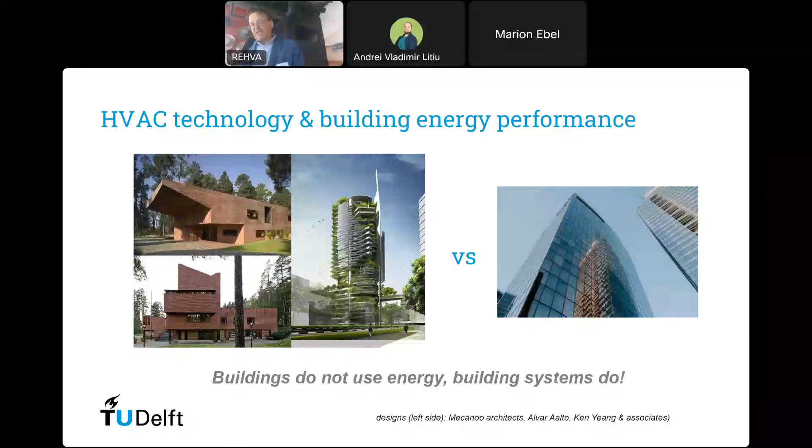If you talk about energy in buildings, people often think it just happens, energy use. Well, buildings don't use energy, it's building systems that use energy, like lighting fixtures, cooling machines on the roof, ventilators. If we are involved in machines for buildings, like EVIA, we definitely have a big opportunity, a big obligation there, to make sure that energy use is decreased, but also with an eye on health and comfort. And that is what we talk about today.

There are 6 issues I want to discuss with you, and I would like to apologize to the people from LightingEurope, because I also have an example related to lighting, but maybe you can ask me about that later. This has to do with daylight penetration especially, but ask me about it later. So there's 6 things I would like to address shortly.

These are issues that I see appearing because we maybe become a little bit too fanatic with energy performance, interpreting the EPBD directive. These 6 issues - the first 4 are directly related to health and comfort: installation noise, overheating issues, ventilation and fresh air supply, and personal control, especially personal control over temperature. These are things I see starting to go wrong in practice with some types of projects, due to the energy policy we're doing. I'm putting this a little bit black and white, but anyhow.

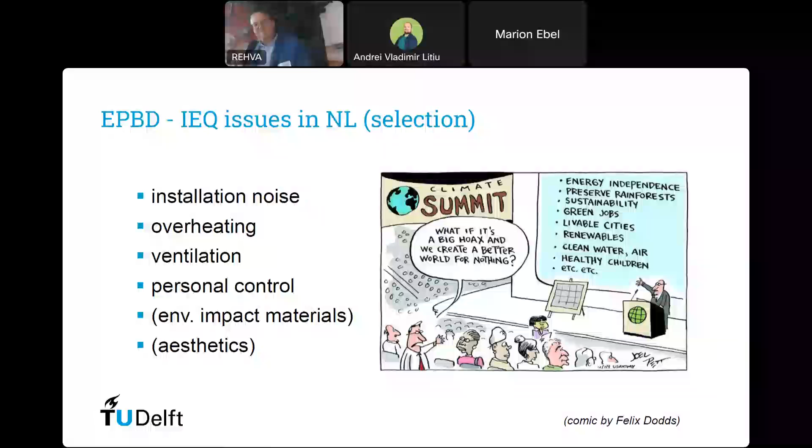Then I want to shortly address 2 other issues that I see. One has to do with environmental impact of materials and circularity, and the other with aesthetics. It's a little bit of my hobby - I work at the Faculty of Architecture, and I have a lot of colleagues that are into making beautiful buildings and built environments, and I'm also a little bit into that. So I have just one slide about that.

If you talk at a party in the Netherlands with an average person about the energy transition, there's a pretty good chance they will start talking about heat pumps, that the neighbors have them, and that they make noise, and that it disturbs their sleep, for example. I'm putting it a little bit black and white. But I think if we really want to convince the average citizen, at least in the Netherlands, then we should talk a little bit about all these energy technologies that could make noise.

Of course, you can design them in such a way that they are not very noisy, but in real life, often people select relatively cheap ones that really create issues - for example, rows, big arguments with neighbors. And again, there have already been lawsuits, etc. So we should not be naive.

If we really want to make sure heat pumps are used more often, which I also support, we have to look at noise inside from your own installation, but also noise towards other buildings and towards the neighbors. Also when you talk about heat pumps for offices and schools, etc. I'm not sure that we're doing that enough. We should do it because, of course, in the EPBD directive it says that whatever we do, it should not make public health worse, and actually, ideally, should make it better.

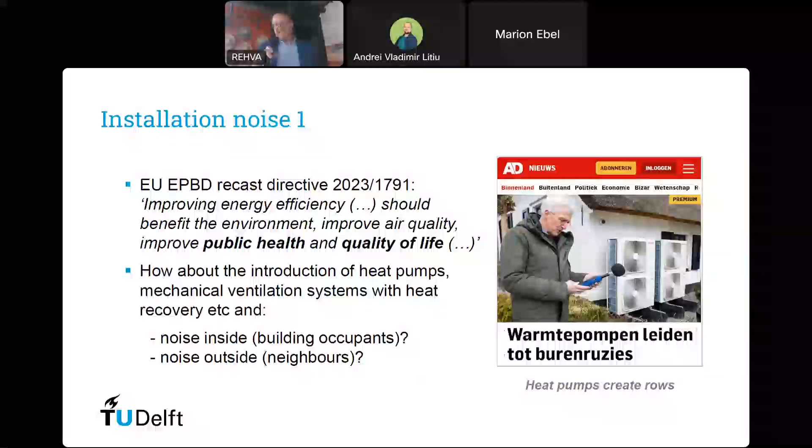Same with quality of life. So we have to think about noise too, because we know noise can have a huge impact on quality of life and health in general.

If you talk about noise, how do we address this in the Dutch context? Well, of course there are official rules about noise from outdoor equipment. In the Dutch situation, that's described in the so-called BBL. It's something new we started at the beginning of this year - I think in English it's called the Environment Buildings Decree. So it's broader than what we used to have with just the building decree.

And of course, on an EU level, we have directives about equipment noise too. But is that connected enough to what we are doing in the corner of EPBD? Question mark. Again, if you want to convince the average citizen in Europe that it's a good idea to do something with PV, like transformers for PV systems, with mechanical ventilation systems, with heat recovery, with heat pumps - if there are too many noise issues related to them, you will see headings in the newspapers that you don't want to see.

Values for what kind of target values you can use for noise inside buildings can be found, for example, in these documents. These are standard programs of constraints we developed in the Netherlands for schools, offices, long-term care facilities, and homes. It gives performance criteria at 3 quality levels. If you speak Dutch, you can download them through this website.

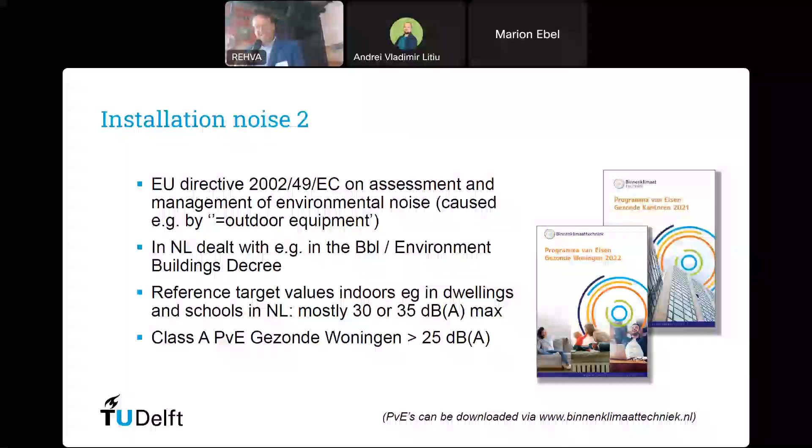Another subject - oh, I see the flag is already there. Overheating. The Netherlands has a long history of looking at overheating in buildings, and we do have the habit of not using very inflexible requirements, like saying no matter what the outside temperature is this week, you always have to stay between 24 and 25 degrees.

No, instead we use adaptive thermal comfort criteria, like the French do, I know. It basically says that if you have a period of like a couple of weeks where it's around 30 degrees outside, you can be more flexible and allow for higher temperatures inside, maybe going up to 27 or even 28 degrees if you have a little bit of airspeed inside.

If you use very strict temperature requirements, independent of the momentary weather outside and independent of whether you're in Italy or Finland, you kind of force everybody into using air conditioning, active cooling, and very high energy use. Maybe that's not necessary from a comfort point of view, and it also has energy penalties. That's one thing I see in projects in the Netherlands, that people tend to use very strict overheating requirements.

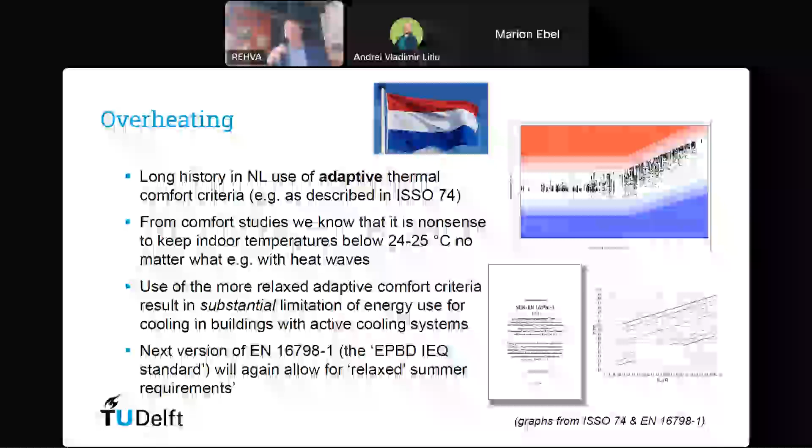I would advocate that, for example in schools and dwellings, we should definitely keep on using these adaptive ones. It's in the European CEN IEQ standard developed in the context of EPBD, the 16798.1. I'm in the position of working a bit on that one, especially on the thermal comfort part, so of course I'm going to fight like a bulldog to keep the adaptive part in.

There's a long history in the UK. The UK has done a lot of research related to adaptive thermal comfort - people like Fergus Nicol, Sue Roaf, Michael Humphreys. But let's keep that in.

We have a Dutch standard, it's called ISSO 74. And this is the picture on the top - it describes how you can do simulations with inside temperature and how you can present those in relation to the adaptive comfort criteria. We first came up with the graph, and after we'd finished it we wanted to use some color coding so you understand what it looks like. Afterwards we noticed it looks very much like a Dutch flag, which was very nice.

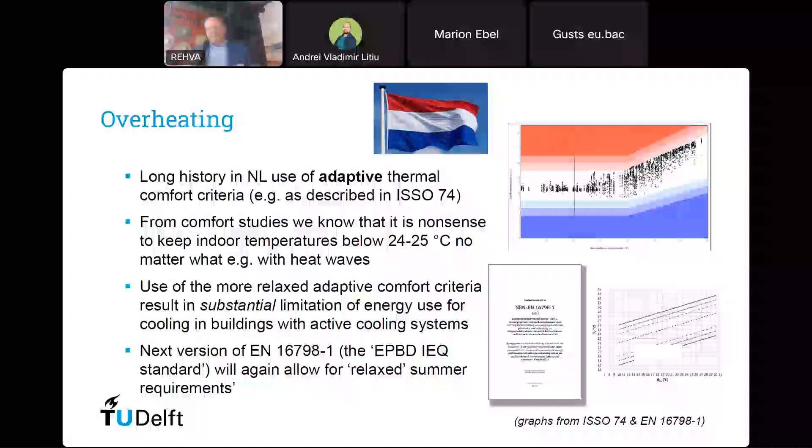You cannot do this in France, because then suddenly you don't understand the graph anymore. Yeah, and maybe if you lie on your side.

Ventilation - another subject I see often in practice causing trouble. From an energy point of view, especially in winter, you want to ventilate as little as possible. That's kind of nonsense, because if you have good heat recovery it doesn't cost that much energy. But within a lot of projects, people say we need to do more with energy, so we should ventilate as little as possible, especially in winter. I think this is a problem, because we know from the COVID pandemic that it's really important to ventilate spaces well, otherwise you have a higher risk of transmission of viruses through the air.

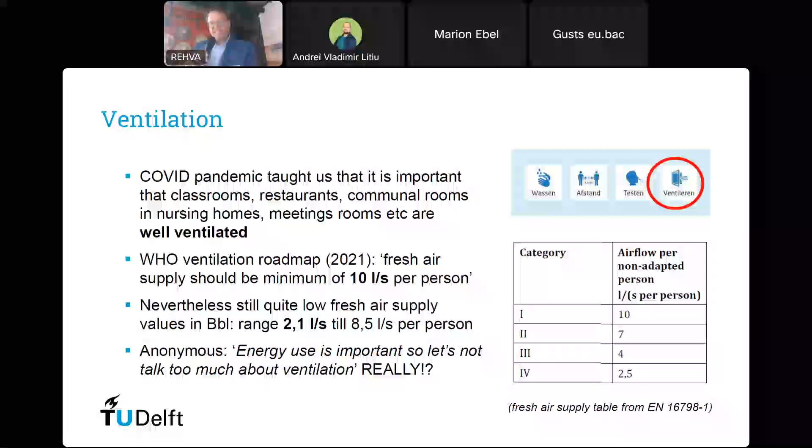But anyhow, we do know that what we now do in the Dutch building decree, BBL, sometimes says 2 liters per second, or 2.1, is good enough in existing buildings. I think we should have a discussion all over Europe about the different building decrees - what the limit values are, and how far off that is from this 10 liters per second. Designing with 2 liters per second per person in the back of your head, like a bedroom for 2 persons, maybe 4 in total - that's just way too low for all kinds of reasons. That's definitely something I see often discussed in practice.

Then this is a bit of a hobby of mine - I once wrote a PhD thesis about it, you can all download it tonight. I see a lot of parties in the Netherlands, and maybe it's just a lack of intelligence amongst Dutch people, but they read the building automation and control systems paragraphs related to the last version of EPBD, and they read it as if we now need to monitor energy, monitor indoor climate, temperature, maybe CO2, and because we need to monitor it, we have some kind of criteria like a bandwidth we have to stay within.

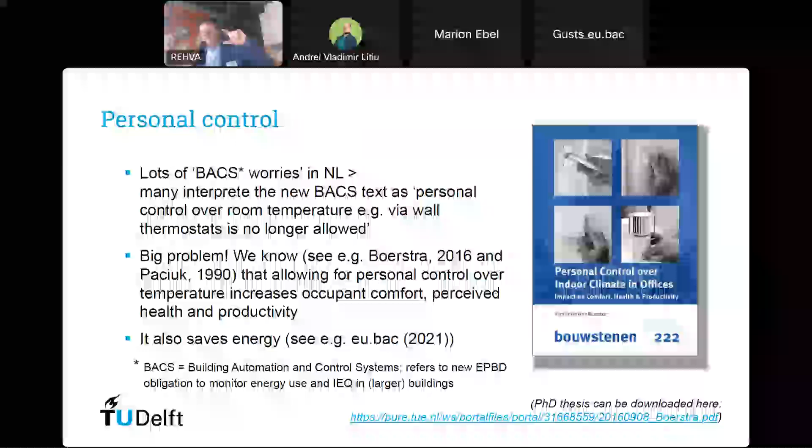And because of that, we should not give people control anymore, because then maybe one day the temperature might be outside the bandwidth. I'm not joking - I've had 3 projects where people basically said, because of 'BACS', we cannot have personal control anymore. So no adjustable thermostats on radiators, no wall thermostats in offices. It's now forbidden because of BACS - that's basically what they say.

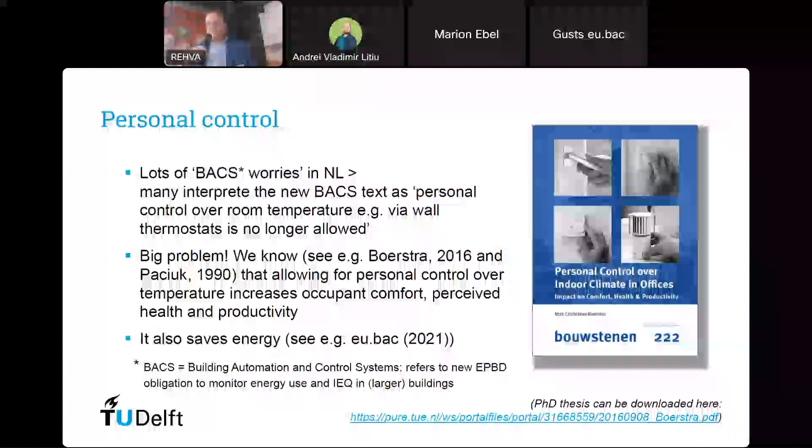I think they misinterpret the text, but we really have to talk about this, because I think it's a very bad idea. We know that if people have options for personal control - Pawel already said this too - they have increased occupant comfort, better perceived health, and it can positively affect productivity. I know from eu.bac, a couple of years ago, they looked into the issue and said it can even save money, not just in a residential context, but definitely there. And it can save energy, because you know much better how to keep the temperature at a certain level, and it doesn't go like an open-closed kind of valve. So let's have a talk about this. Very important.

Then, so the last two, maybe crazy stuff. Do you have two more minutes, Pawel? About four. Okay.

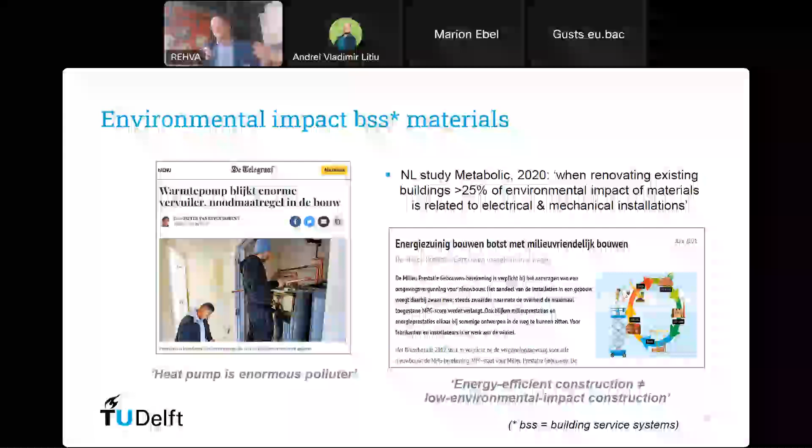Another thing I worry about, and that's really on the agenda in the Netherlands, especially at the university - I have a lot of colleagues really into circular buildings. If you're into circular buildings and you do a little research, you'll find out, see the quote on the right, that especially if you renovate buildings and reuse columns and floors, the hidden environmental impact of the materials you use matters. Often when you do deep renovation, you change the heating, electrical wiring, lighting, cooling system - there's a lot of metals involved, copper, aluminium, you name it. The hidden environmental impact on just installation and replacement goes up to more than 25% of the total environmental impact of the renovation. It's a huge impact, and I'm trying to convince REHVA to put this higher on the agenda. I know the next version of REHVA, maybe two after next, there will be an article about this, but we have to talk about this.

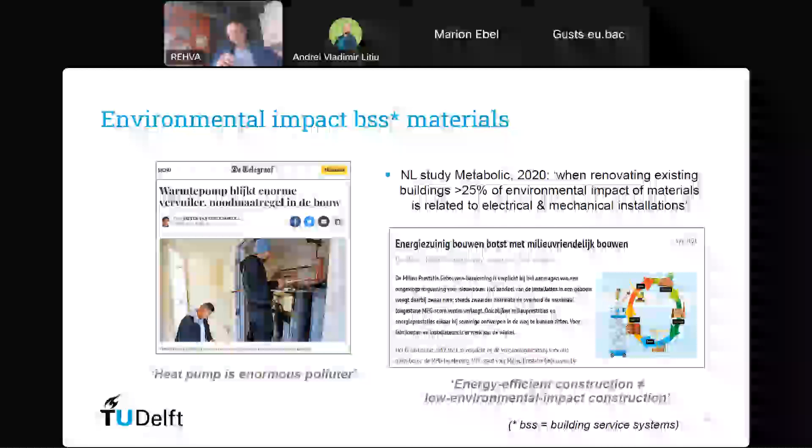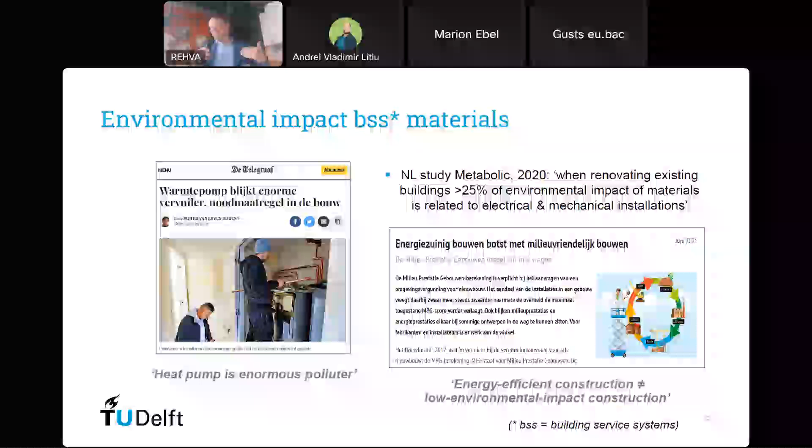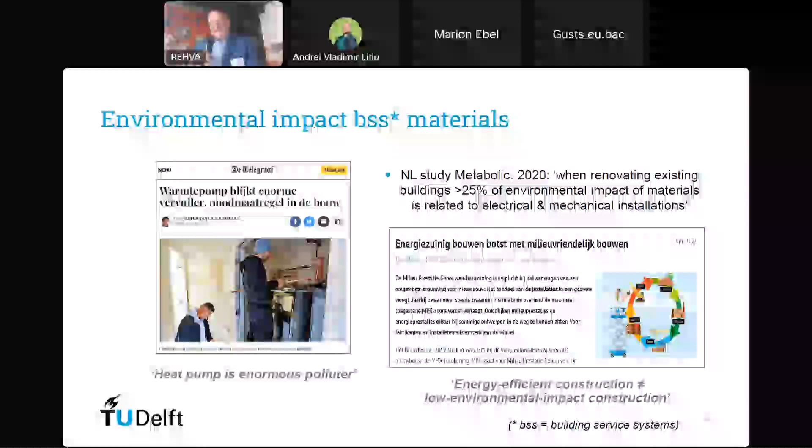And then, of course, if you do the right thing on the energy performance side and install a heat pump, for example, often the thing you use to improve energy efficiency at the same time has a much higher material impact than what we used to do. A standard gas heater that we used to use in a residential context uses maybe a third of the amount of metal that a heat pump uses. I'm not saying we should not use heat pumps, but if we have a discussion, we should look at energy, environmental impact of materials, and health and comfort - not just energy on one hand and health and comfort on the other. Of course, we also have legislation coming related to circularity and environmental impact of materials, so we cannot put our heads in the sand, as we say in the Netherlands.

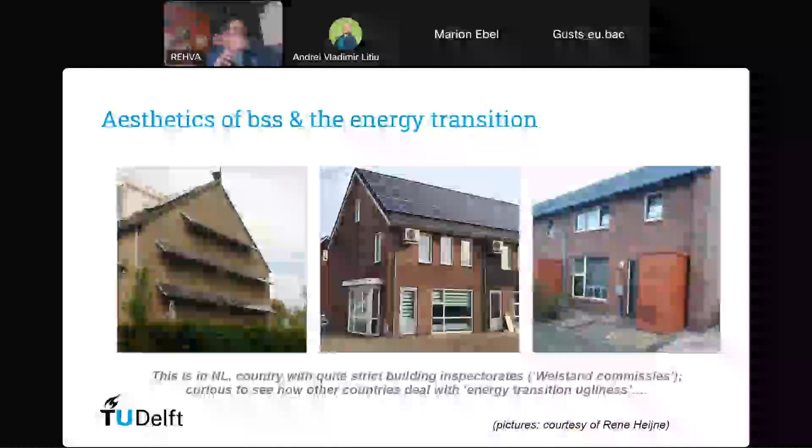This is my last remark. A friend of mine works for what we call the welstand in the Netherlands - something really Dutch, I think. In the Netherlands, whatever we do - I'm not going to make jokes about Belgium - if you change a city or neighborhood or a row of houses, you have to go to the welstand and they will look at it to see if it's beautiful or not. That's basically what they do. So it's like an aesthetic building inspectorate, I'm not sure how to say it.

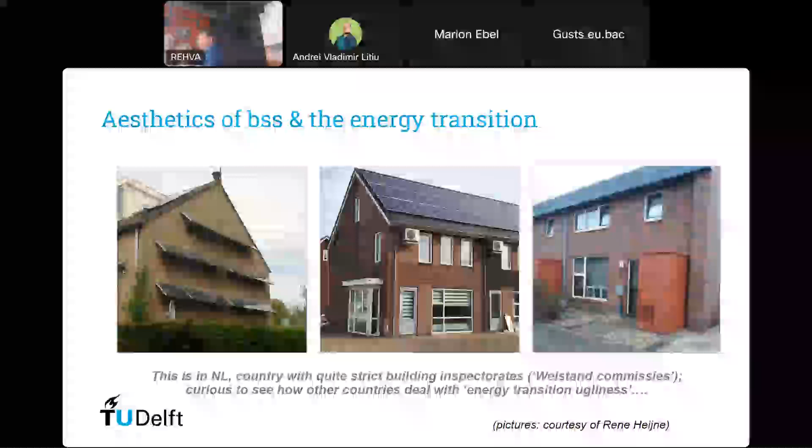Again, these pictures are from projects that kind of slipped through welstand. It's from a friend of mine who works there, René Heijne. He was not too happy with this one, for example, because the color is just off. Maybe make it gray or make sure it's also made out of brick. There's a heat pump in here. And also the one in the middle, you get these little gray things - the outside unit of your heat pump - I'm not sure I'd like to look at that if it's my neighbors having them. If I have them myself, it's okay because I don't see them. But on the other side, as in the example on the left, that's of course an existing situation.

I think there are more subtle ways to include some PV panels. I'm a little afraid that if we don't think deeply about this, Europe will become much more ugly than it is right now, if we just put all kinds of energy technologies on and around and on top of buildings without thinking about aesthetics. So think about this.

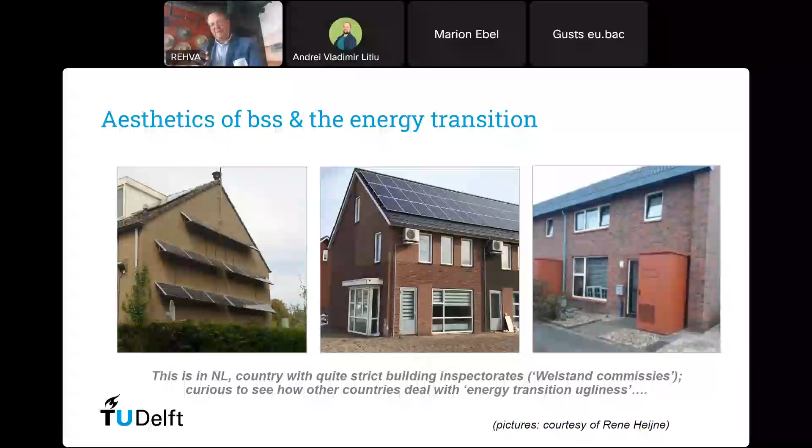So my last slide, take home message from the Netherlands to Europe: further implement EPBD, very good idea.

I also support this strongly. I think we should even actually hurry up things more than we're doing it right now. Energy performance, energy transition is very important, but let's really keep a keen eye on issues that are happening in the corner of maybe installation noise, inside and outside, overheating. Let's avoid too strict summer requirements. It definitely has a dimension in the energy corner.

If we talk about ventilation, let's have a discussion again. I'm sure Pawel is very happy about this, about how much fresh air supply we need, and are we not forgetting about all the health effects in that corner. Definitely, let's talk about personal control over temperature. Let's not lose that. It's very important to have it and to keep it. And we should address environmental impact of installation materials and aesthetics.

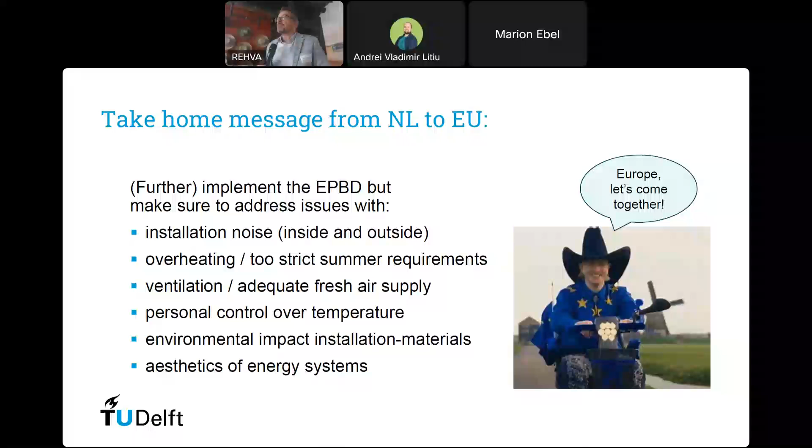Valérie is the project director of indoor environmental quality at CEREMA, an expert in building ventilation, air tightness, and indoor environmental quality. Currently, she serves as the project director for indoor environmental quality and ventilation at CEREMA. And for those who don't know, CEREMA is a public research and design office in France. She leads national and European working groups to ensure consistency between standards, regulations, and latest research findings.

Her responsibilities include initiating research projects, such as revising the ISO 9972 standard and managing submissions for major European projects for Horizon 2020. As the convener of CEN-TC 156 WG23, you'll have to explain to us what it means. Anyway, she leads the revision of the EN 16211 standard. And for AIVC TightVent, she's a coordinator of the TightVent Air Tightness Association Committee, working on air tightness and inspection of ventilation systems. So, the floor is yours.

Thank you very much, Pawel. I will talk to you about how we have already started in France to implement the quality provisions that are in the EPBD directive. Well, we are not quite there yet, but we still have done something in the previous regulation. As we have already discussed at length, indoor environment quality is a new focus in the EPBD directive. This is directly in Article 1, and we even have a definition of indoor environment quality, which includes temperature, humidity, ventilation rates, and presence of contaminants. And all this needs to be taken together with the energy performance of buildings, which is a very good thing.

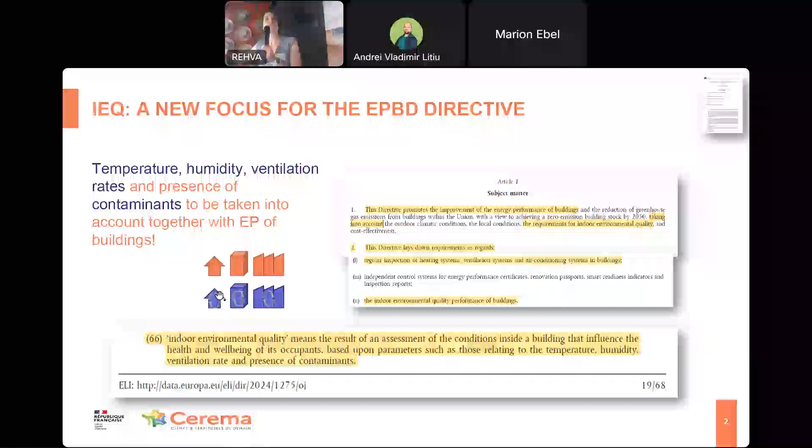So you will see my nice icons here. It's not done by AI, it's done by myself, and I'm very bad at doing those kinds of things, but that's supposed to say dwellings, single, multifamily, and that's non-residential buildings, that's new buildings, and that's refurbishments. And this will be useful for the rest of the presentation because some of the regulation applies to one or another. I should try to use AI to do those things better.

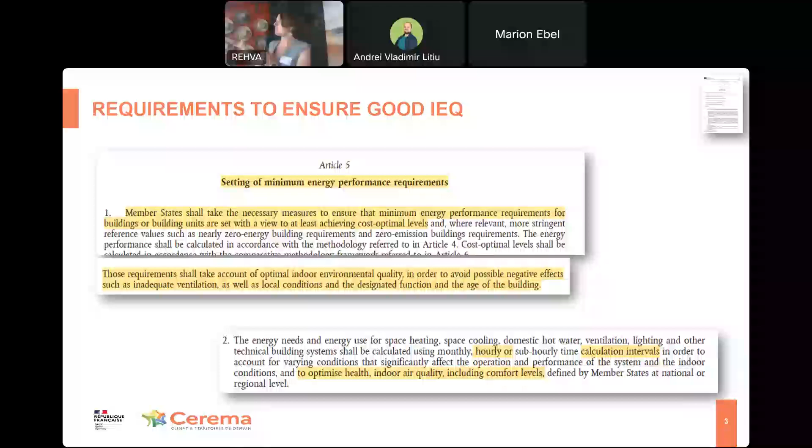Okay. So in Article 5, the EPBD directive says member states shall take necessary measures to ensure energy performance requirements, and those requirements shall take into account indoor environmental quality also. So what we have right now in our energy performance regulation, which is called RE 2020, which came into application in 2022. We always have 1 or 2 years after our objective, but that was because of COVID. We already have this thermal comfort assessment, as Atze was saying.

We've got in the regulation indicators on 3 subjects. One about life cycle assessment, well, actually 2, full life cycle assessment of the building, about the energy use, the use of primary energy, and encouraging renewable energy, etc. So we've got 3 indicators on this topic. And then we've got one about thermal comfort, which is actually the sum of the difference between the actual temperature and the comfort temperature during the summer outside heating season.

And this comfort temperature is actually adjusting over time, because if you've got like 10 days at hot temperature, it's adaptive comfort, so this temperature increases. And we've got a limit on this degree hour of discomfort. The calculation is an hourly calculation, and this regulation is really performance-based. That means that we've got very few prescriptive requirements in it. We just need to reach those indicators.

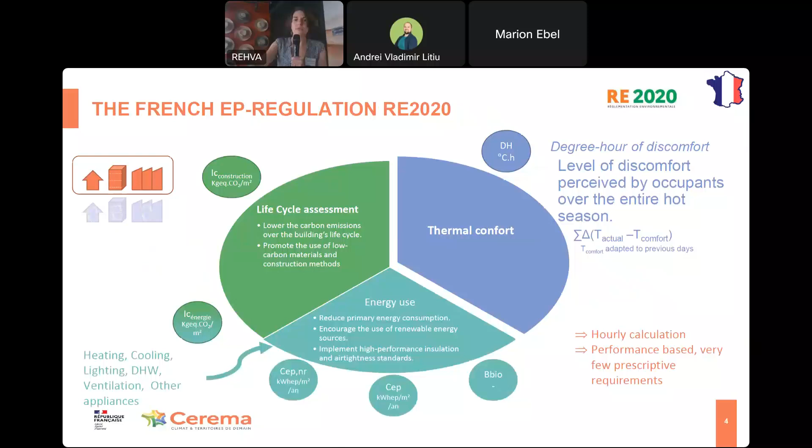In existing buildings, well, we still have, so you see, new buildings, orange ones, on my topic here. In existing buildings, where we are not quite there yet, we do have a regulation that applies to very big renovations in some kinds of buildings. And we do have an indicator for thermal comfort. We calculate the temperature that is reached after 5 hot days.

And there is a limit, but that is building dependent. So this limit can actually be really high. For example, I had an example once where the maximum was 32 degrees. And so as long as we were below 32, it was okay, so this indicator is not very good, but we should revise this regulation soon, whatever soon may mean.

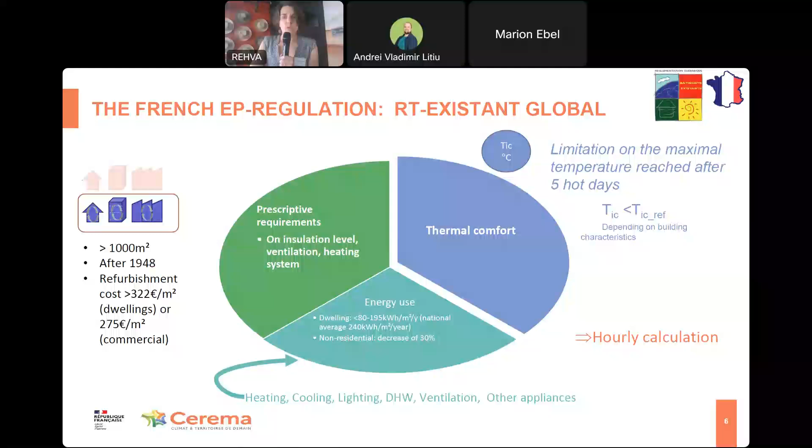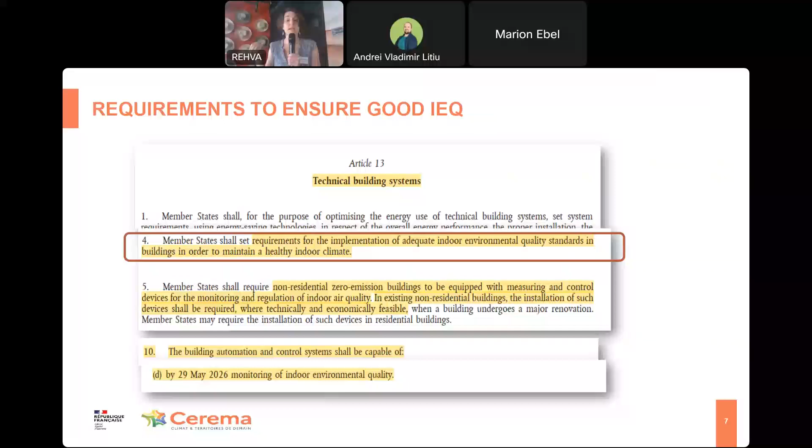Now, this is for temperature, but it's not the only focus of the EPBD. The EPBD also focuses on health, and health includes indoor air quality. That is not included in the energy performance regulation. It's another code that makes the requirements on indoor air quality in France. We've got the construction codes that say air renewal should be such that in normal conditions of use, the indoor air pollution does not endanger the health and the security of occupants, and that condensation is avoided except temporarily. So that's the construction codes.

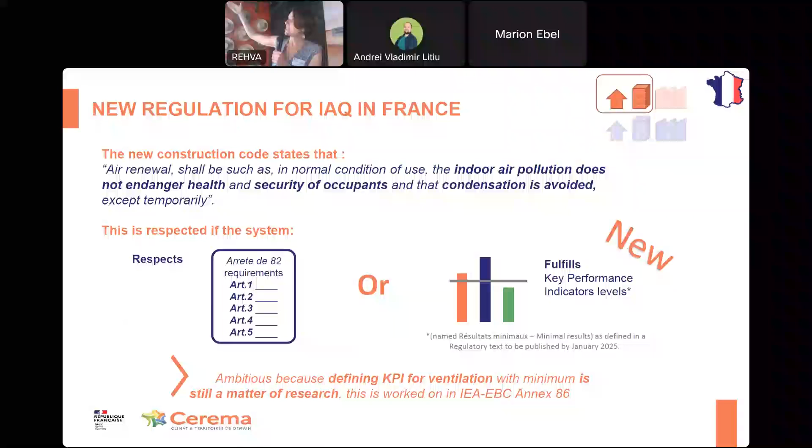And then we need to say, what does that mean actually? Because that's, well, quite easy to say. So in the regulation, we say it's okay if it fulfills the prescriptive requirement from 1982, which gave flow rates, a bit like everybody, per room. But it is also okay if it fulfills new key performance indicator levels that will be defined within 2025. So we are actually working very hard to be ready for 2025 and define those key performance indicator levels that ensure that health is not endangered in our buildings.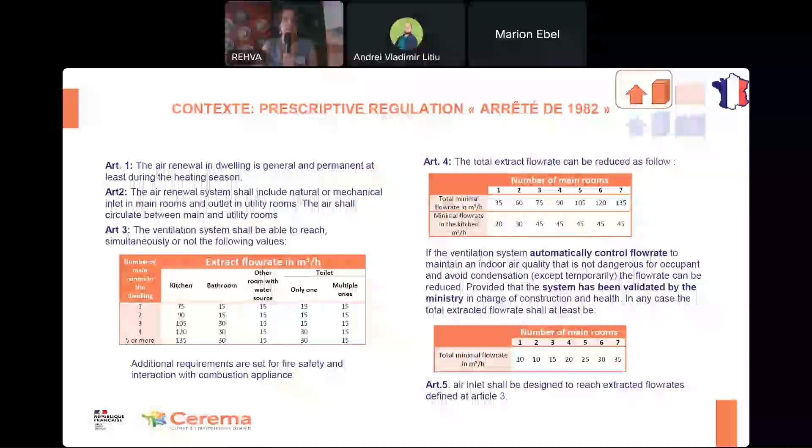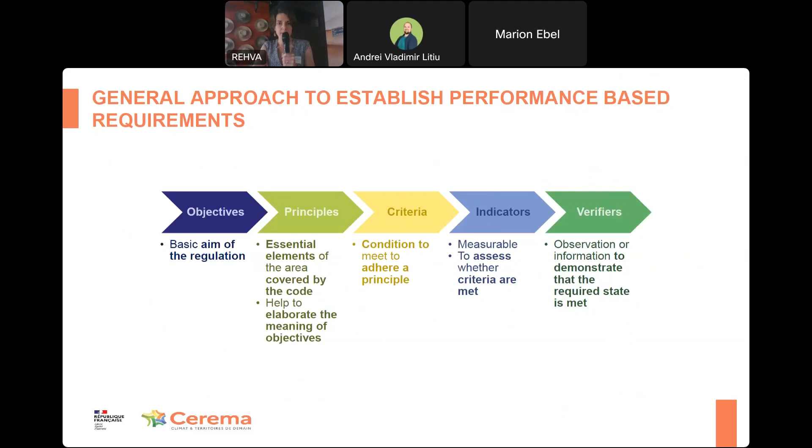So as I say, this is a prescriptive regulation that will remain as it is, but we will have a new alternative, which will be performance-based. And that's what we are defining right now, trying to establish what the indicator will be and how we will check that the ventilation system actually does not endanger the health of the people in it. So to define those key performance indicators, we first had to think, what is the objective of the indoor air quality management strategy? What do we want to reach?

We've got objectives on health. We want to limit the exposure, long-term and acute, to pollutants emitted by the building and by humans. By humans, I mean by human activities also. We have objectives on well-being. We want to rate the impact of the system on sleep quality, on the stuffiness in rooms, and we also want a certain level of perceived air quality.

For example, we are talking only about residential buildings here, the focus here is only on residential. We are not talking about non-residential here. A level of perceived air quality in the toilet, for example, and we've got the risk of condensation that may affect the building durability.

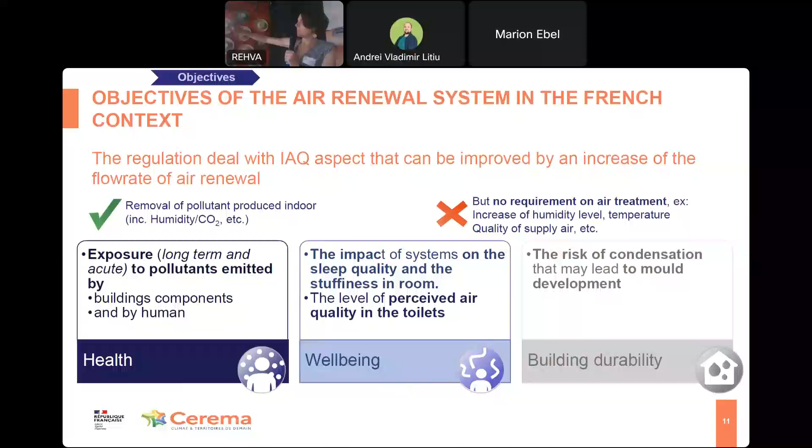Starting from defining the objective, then we say, okay, how do we want to assess that in the design stage? We want to assess that through preliminary simulation. We talked a bit before about the indicators not being the same for assessment in the design phase, for monitoring, or during the commissioning of the building. And here we only focus on the preliminary simulation, so the design phase.

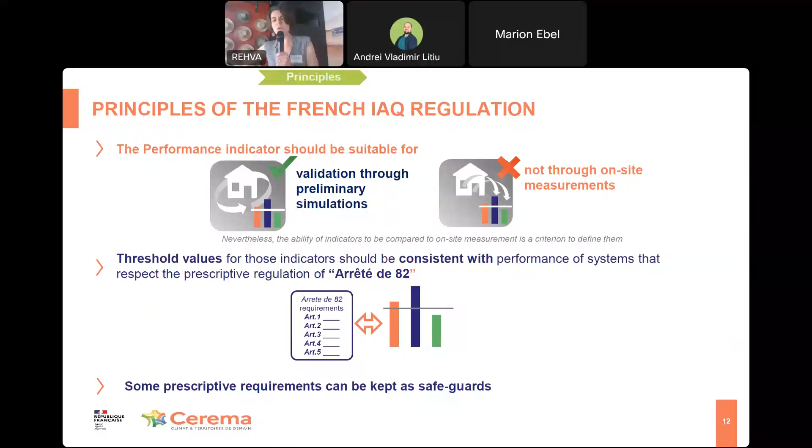And we want to have threshold values that are consistent with what our systems are doing right now. So for the systems that are consistent with what we call arrêté 82, we will have threshold values that are consistent with that. And so here is the indicator we have basically chosen. First of all, it's very important that it's not possible to assess indoor air quality with just one parameter. So actually, to have a requirement that is equivalent to our prescriptive requirements, we need 5 parameters.

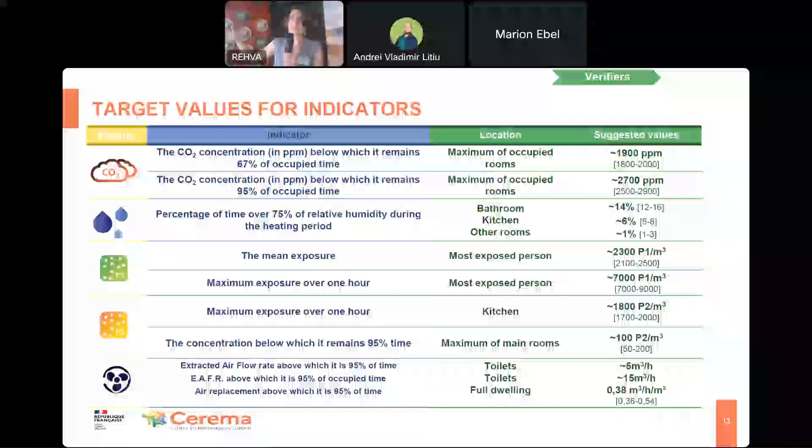One on CO2, one on humidity, one on fictive pollutant P1 that is emitted continuously, one on fictive pollutant P2 that is emitted during cooking, basically, and one on air renewal rate. And for each parameter, we have 1 to up to 3 indicators associated, okay? And then we have a target value for this. The values given here are not validated yet, but given the results of our simulations, it should be more or less that. That's very, very high, but that's actually how our systems are performing right now.

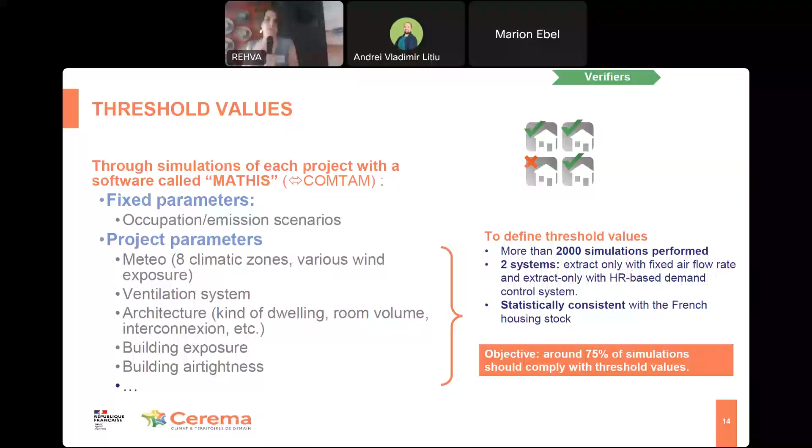So what we have done is more than 2,000 simulations with the 2 systems, on a series of buildings that are consistent with the building stock in France. And so the objective is that 75% of the simulations meet the new threshold values that we will define, so that we have 2 regulations that are consistent with one another. And that's how we get those values.

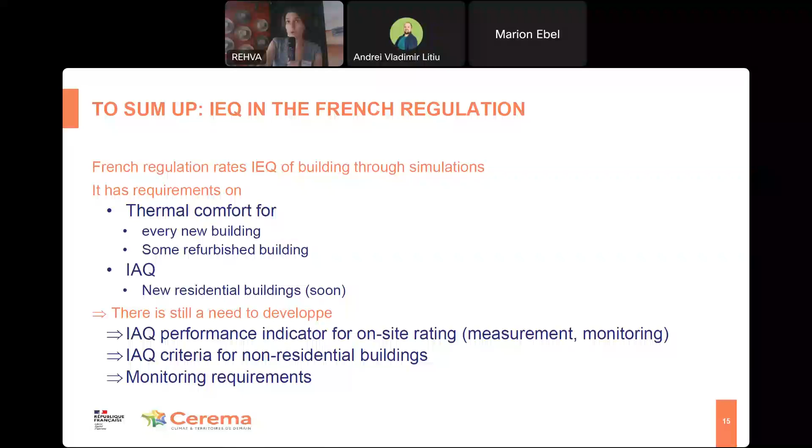So to sum up, regarding indoor environment quality, the French regulation rates indoor environment quality of buildings through simulations. It has requirements on thermal comfort for every new building and for some refurbished buildings. It rates indoor air quality solely for residential buildings, but we still need to develop indoor air quality performance indicators for on-site rating, measurement and monitoring. We need to develop indoor air quality criteria for non-residential buildings, and we need to develop monitoring requirements if we want to fulfill the EPBD directive.

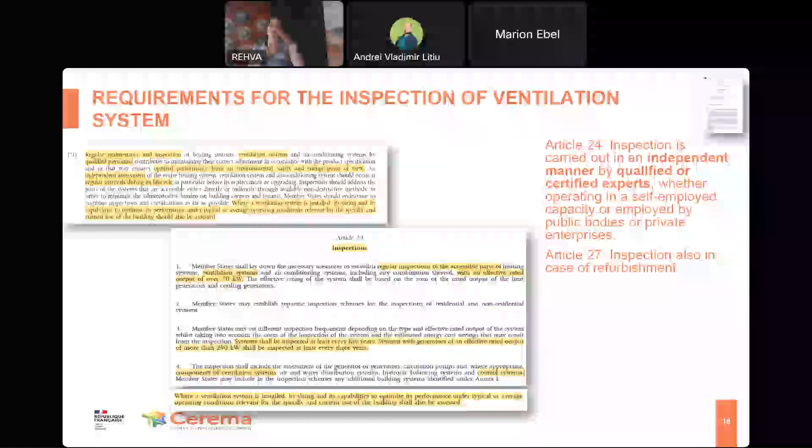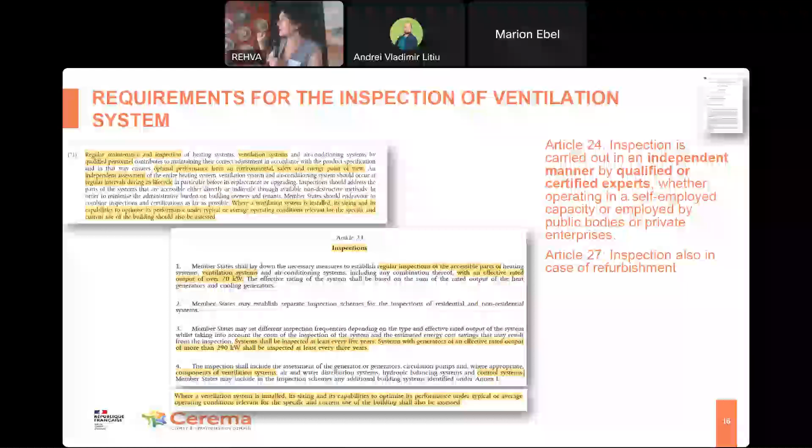Before I finish, I would like to also insist on the inspection of ventilation. So Pawel, you were asking about TC156 working group 23, about inspection of ventilation systems, of which I happen to be the convener at the CEN European level. And in the directive, there is this Article 23, which is very important, that now imposes a regular inspection of ventilation systems together with heating and cooling systems for systems that have an effective rate above 70 kilowatts. So that means that big systems will need to be inspected every 5 or 3 years.

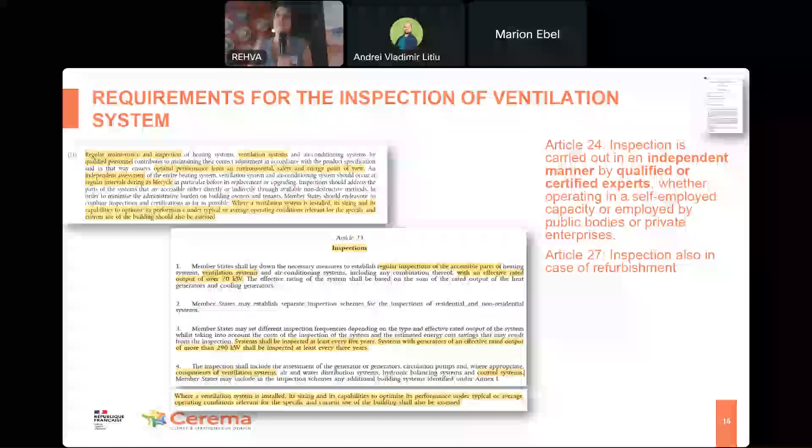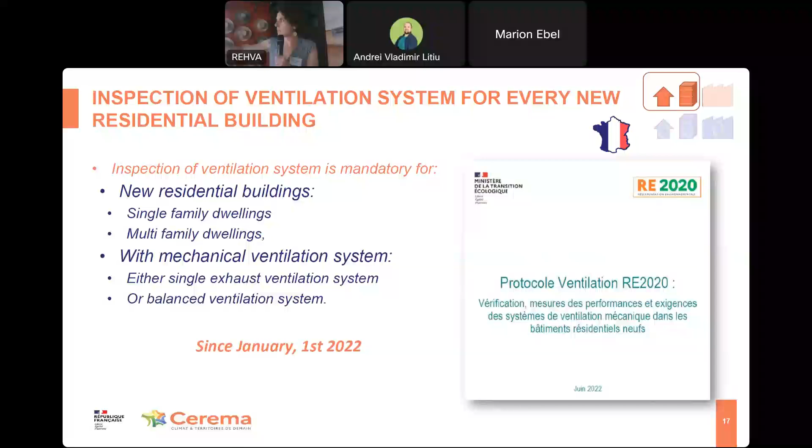So what we have in France now in regulation is a mandatory inspection at commissioning, only at commissioning, for every new residential building. Again, it's only focused on residential buildings, unfortunately, but our regulation is 40 years old, so we now know quite well how to inspect those systems that are all the same. So we do have a protocol, and we have had this mandatory since 2022. This is done by a qualified inspector that is independent, with the whole process of training and validation. And for one thing, we are also ahead of schedule.

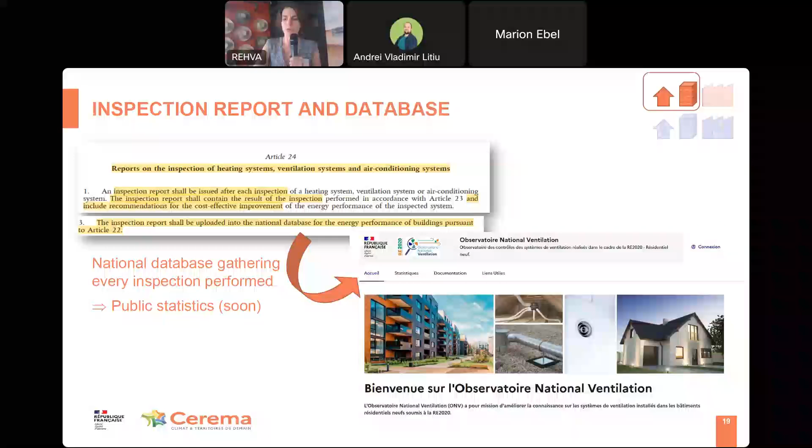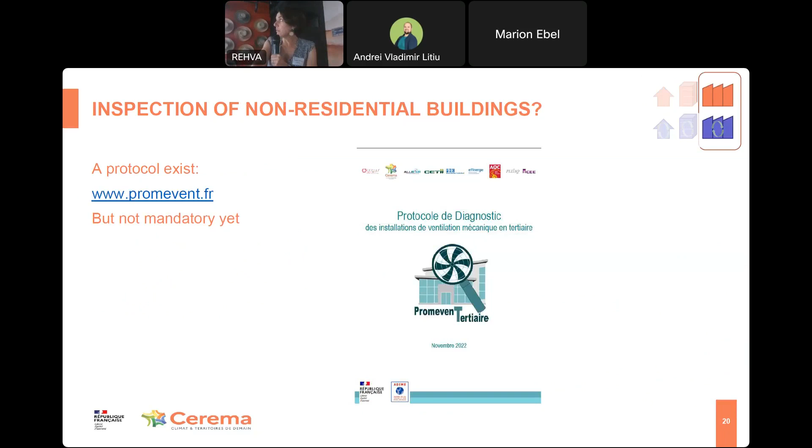In Article 24 of the EPBD directive, you've got the mandatory database that needs to be set. That means that all inspection reports should be uploaded in a national database. And that's actually what we do. We have this National Observatory for Ventilation, where every inspection report is uploaded, and that will provide public statistics. It's not yet available because we need to have enough data to put the statistics online. Otherwise, we would be able to spot which building has been inspected. But within a few months, it should be done. And for non-residential buildings, we do have a protocol, which is already done, but it's not mandatory yet.

So to conclude, the challenge for the coming years, at least in France, will be to build something for non-residential buildings, make indoor air quality requirements, make a mandatory inspection protocol at commissioning and then every 3 to 5 years. That's the big thing. Regarding renovation, we need to build this renovation plan. I was talking about it, and we need to include indoor environment quality requirements and an inspection protocol also for those refurbishments. We need to develop the smart readiness indicator as required in Article 15, also including the resilience of buildings. And we need to work on building automation and control also.

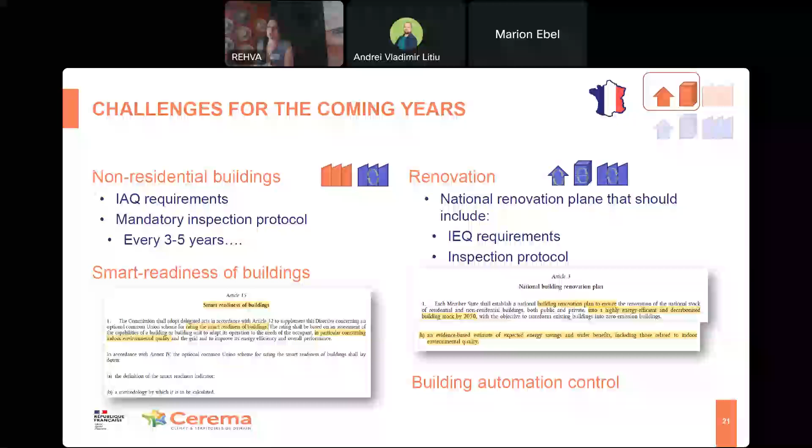In standardization, we still have challenges. As I was saying, I'm in charge of EN 16798-17 about the inspection of ventilation systems. And this standard needs to be revised to better tackle the question of demand-controlled ventilation systems, because this is probably one of the answers to good indoor environment quality while controlling the building energy use. We have to better tackle the inspection of indoor environment quality also in this standard. Actually, we just check the flow rates basically at the ventilation system. And also tackle the question of the regular inspection, which is not the same as the inspection at commissioning.

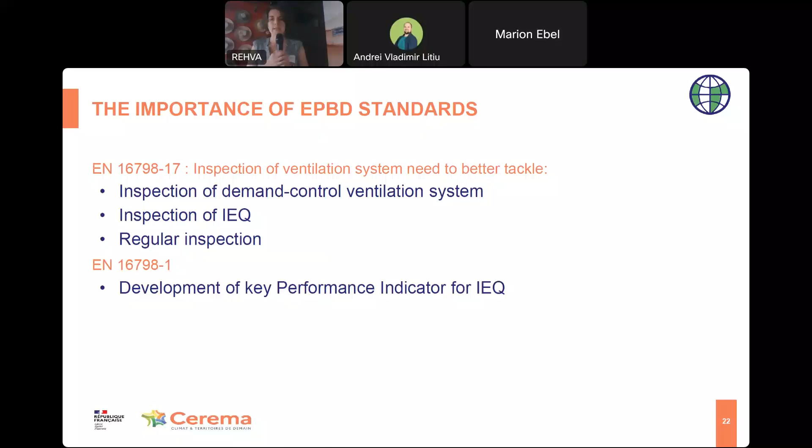And in EN 16798-1, we need to develop also key performance indicators for indoor environment quality to give guidance to member states to develop their own performance indicators as required in the EPBD. Thank you for your attention.

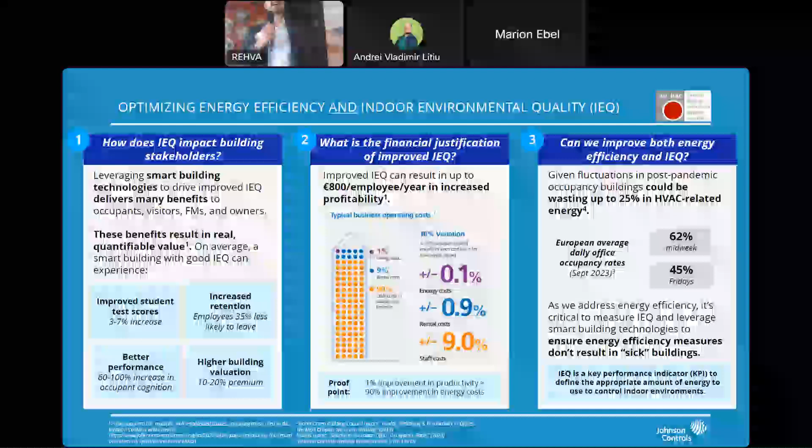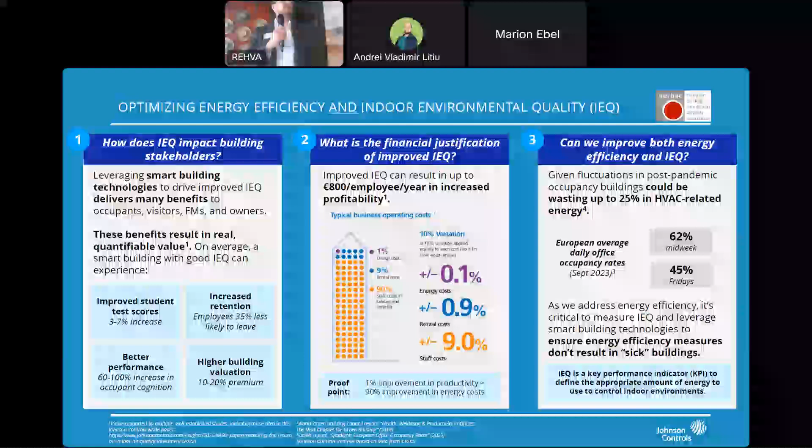I'm very honored and pleased to be with this esteemed group. Thank you so much for having me, and thank you to eu.bac for hosting me and Johnson Controls as part of this group. It's really an honor, and I've just been eating up everything we've been talking about so far. What I hope to contribute, both in this short couple of minutes and to the panel discussion, is the perspective of what it takes to make this stuff happen on the ground.

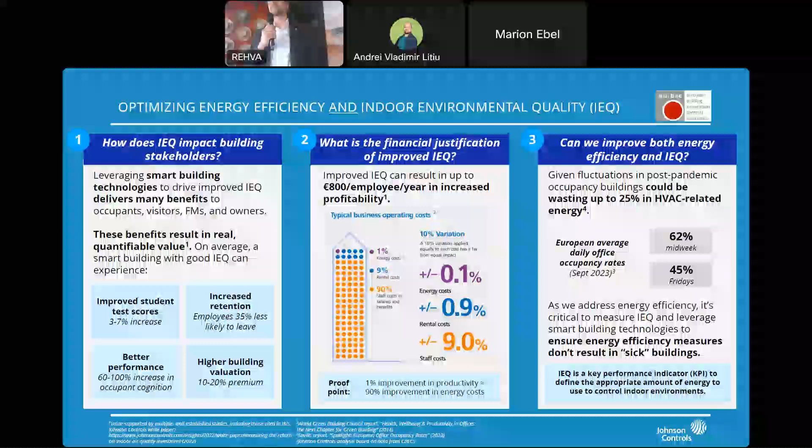We've talked a lot about the why, and you'll recognize some statistics, even a graphic in the middle, that's already been presented to you today. I believe in this room, and with some outside of this room, the why is already well understood. We've got statistics. But what it takes to actually make this stuff happen on the ground is where we need to focus our efforts. My team and I think about this every day in front of customers and prospective customers who are trying to make this decision: do I invest in this, yes or no?

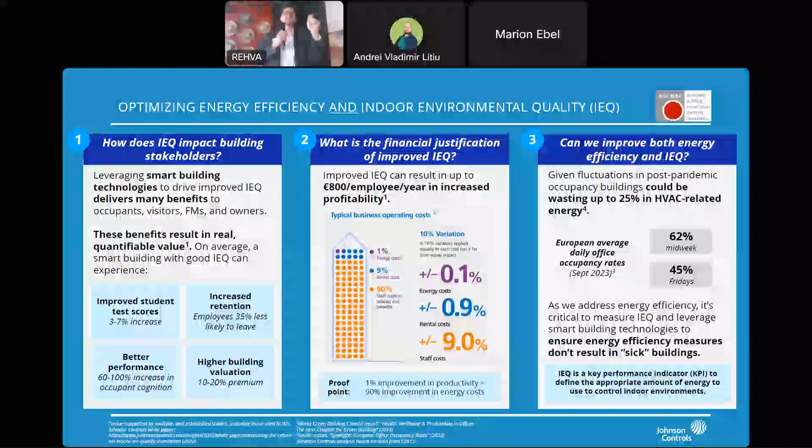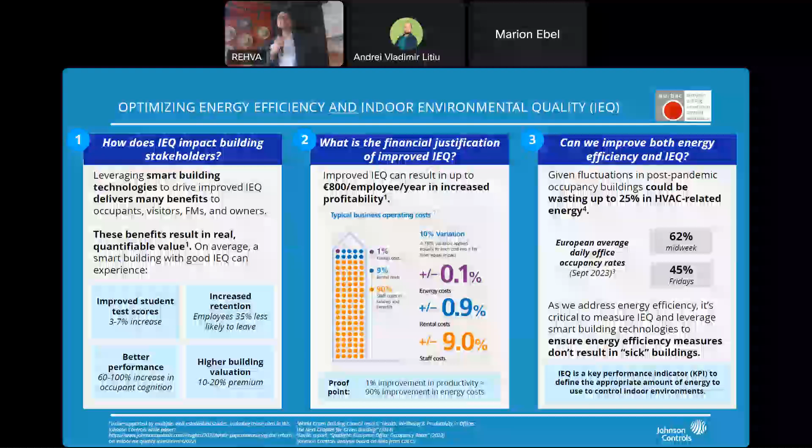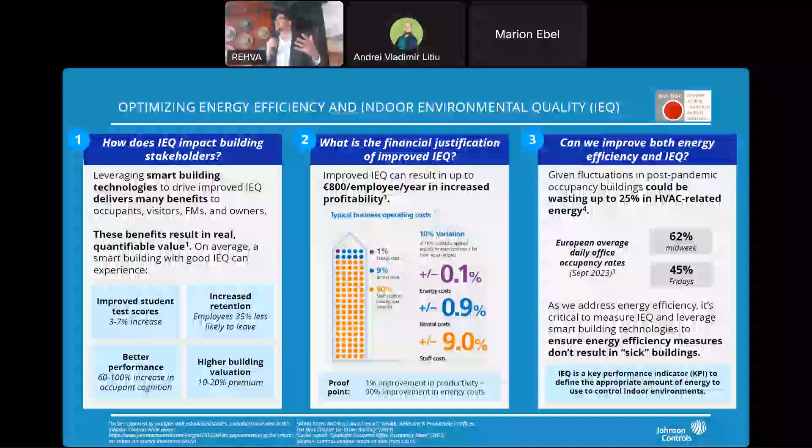Oftentimes it comes back to return on investment. There may be some carrots out there to encourage me to do it, there may be some sticks, but it needs to make good business sense. So I've got a statistic on the top middle of this page: €800 per employee per year. That's our conclusion after going through a lot of the existing research on what is the business justification of investing in improved IEQ. And I think Pawel may have been an author on some of the papers we referenced there.

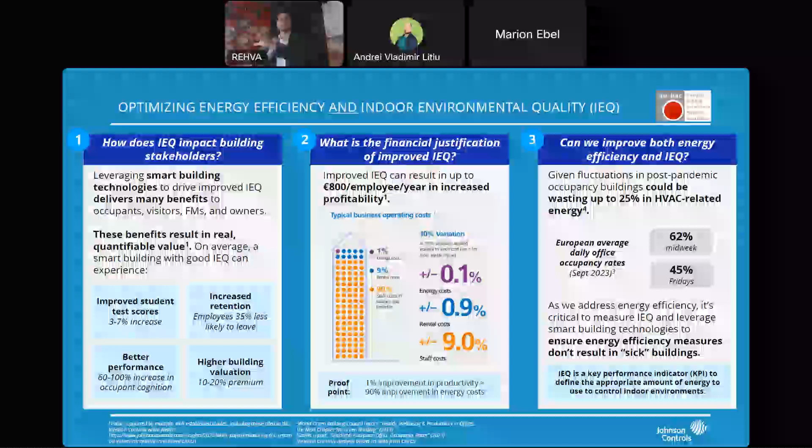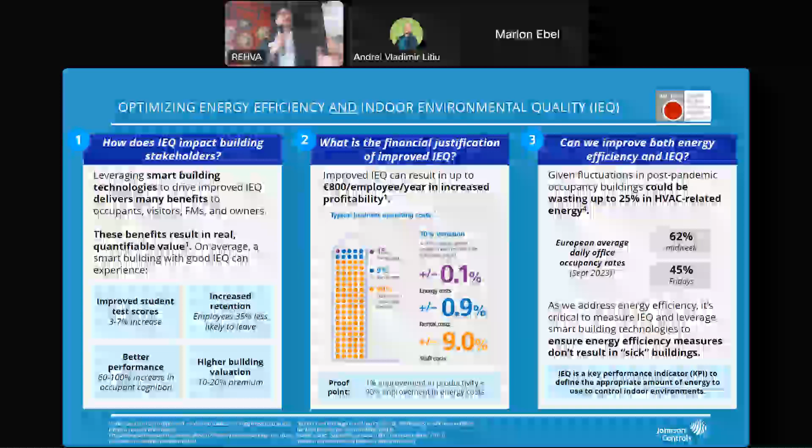I want to focus, as I finish up, on the right side here. We've talked a lot about how it could be costly to implement IEQ measures. Costly versus what baseline? That's something I'd like to explore in the panel in a minute. But we've also got this force acting upon us, this pain point of occupancy rates in buildings, especially commercial buildings, not being what they were designed to be.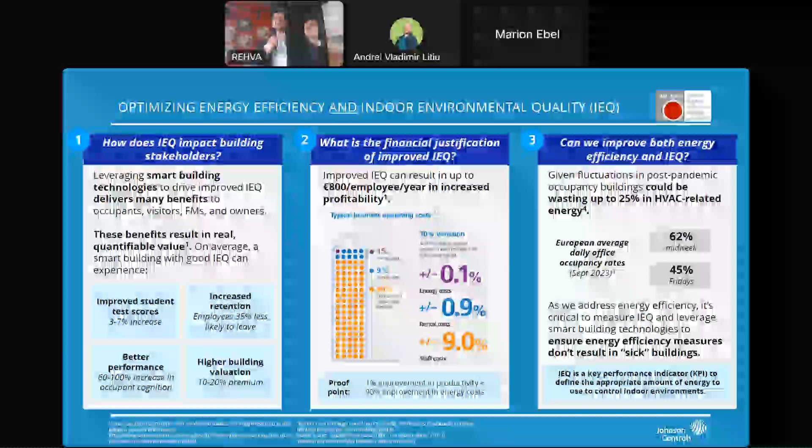So my challenge to us is, as we consider energy efficiency measures and improvements, we've got to use IEQ as a KPI. That word, indicator, has come up a lot already this afternoon. That should be our minimum in some cases. We cannot improve the energy efficiency of a building without also being mindful of the impact on the humans who occupy that building. So thank you for having me, thank you for including me in this discussion, and I look forward to talking more in a minute.

Today we have the opportunity to work with very efficient light sources, and therefore we have often focused a lot on energy efficiency. But a very important aspect is actually the quality of light which we could get there. For example, in such a building, we could ask just for basic quality, just to see anything in a building, or that we can really appreciate the building. And the quality of a building is also how much it is used.

If we create very attractive spaces where the public, the younger generation and the older generation would like to go to, then the building is actually used. But if we just install the minimum light quality, then probably people will not find it very attractive to go to the library, to study there, to learn something there.

So therefore, we recommend really to consider this aspect. It's similar to food. You could think for dinner, for example, a very nice, easy instant soup to do this. For one evening, it might be okay because you might be in a rush. But just imagine eating instant soup for 10 years. So it's more really about the quality of food which you have there.

And therefore, we are asking to create not the minimum lighting quality in a room, but a sustainable quality. And therefore, you will have benefits for well-being. We've heard something about health, the circadian rhythm, the changes which are there.

And so it's also really about figuring out how we can actually control this afterwards, not only planning it, but also making sure that it's installed there. And today we have even metrics available where we are not just asking how much light is coming out of a fixture, but actually how much light is perceived by the eye in the area where you're looking at.

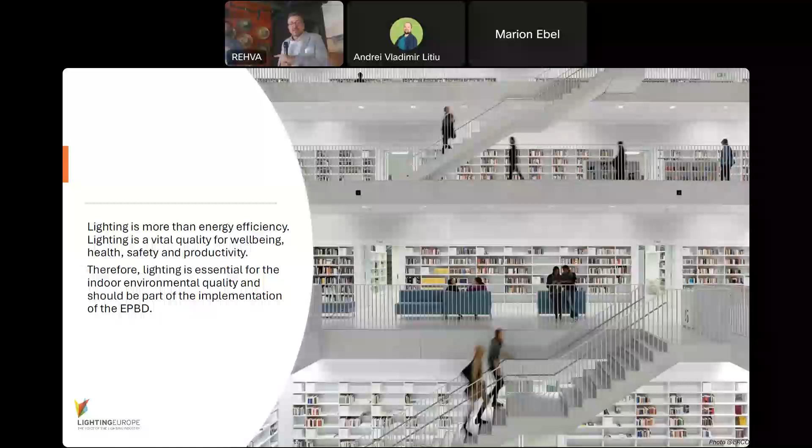Okay, the last panelist, Adam. He doesn't need an introduction because he was introduced in the first session. So those who missed the first session, they missed the introduction to Adam. So I think maybe because we really want to make time for some discussion.

I haven't particularly got any slides, but just a couple of things.

BB 101 I mentioned earlier on, and as we've been crying out for a bit of light discussion today, BB 101 was all about thermal comfort and the performance of classrooms. And it fundamentally changed the way schools in the UK look. They placed a much bigger focus on daylighting being available in those schools. But a big part of that was around thermal comfort, and BB 101 uses adaptive thermal comfort.

It's a development beyond CIBSE TM52, which is pretty readily used in the UK. We're very fond of using windows for controlling temperature and providing ventilation in the UK, and a lot of that is driven by our climate.

It's never that hot, it's never that cold. We talk about this weather all the time, but it's never particularly extreme. In fact, that's probably one of the reasons why we've got some of the leakiest buildings in Europe.

So right now, we're tightening up the fabric of our buildings, and then we're making large holes in it so it can breathe. Initially we didn't, we just tightened them up, caused lots of problems. Now we are putting holes into the building to let them breathe.

We're not quite there with heat recovery systems yet because of our climate. It hasn't been a real necessity, but it will be as we continually strive to improve the energy efficiency of those buildings. The next thing that we have to struggle with is there's no one to install them.

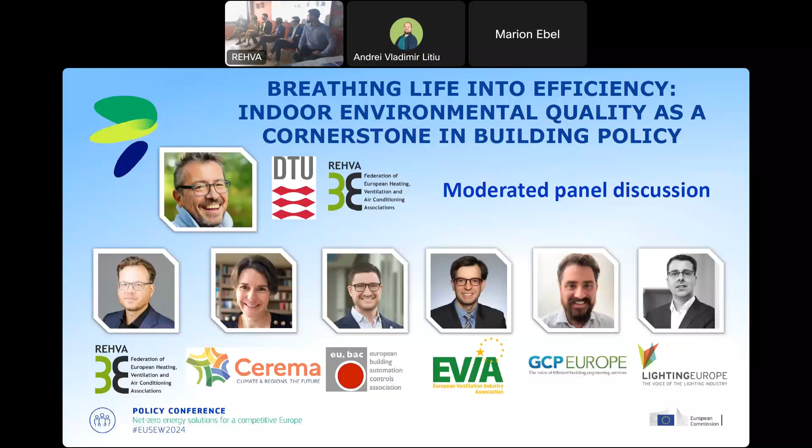I think Delft is a good example. There are political changes across Europe, a shift to the right here and there, and I think it's good to rephrase what we're talking about. If you talk about greenhouse emissions or saving the planet, certain parties aren't that interested, but if you combine it with a message about health, we should be much bolder. Parties to the left and right, especially if you make it obvious that people with less money may be suffering from moldy houses or living close to highways, exposed to higher concentrations of particles than rich people in big villas. We're maybe a little too modest about what we do. This is all about saving the planet and diminishing greenhouse gas emissions, but also a good opportunity—if you change facades of buildings—to really improve health and comfort of people. Right now we talk too much about doing this for energy, and by the way, on the side, it also helps make Europe a little less unhealthy. We should rephrase the message.

I think it's a win-win situation when we have the opportunity to renovate our buildings, not just looking at energy efficiency—that's what you're pointing out. There's actually a second take: we can improve quality for a wide range of people, addressing multiple aspects like well-being and health. Those issues are quite critical. So when you do something, do it really and make the best out of the money when you invest it.